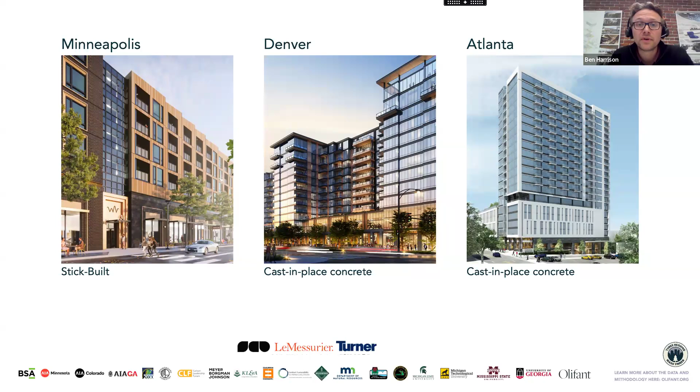Vincent kind of teed up what we've been working on for the past 2 years, and we're really excited to share some of the work: the carbon savings, cost, schedule, everything. We can dive into that. But first, we wanted to thank all of the organizations, suppliers, AIA chapters, and local architecture and engineering firms that we met with along the way to help us in this process. The process started with us meeting with all of those local AIA chapters to determine a program type and rough construction size that would fit within their context and something they may be looking for more of. Not surprisingly, the construction type that all 3 selected was housing.

We definitely have a housing crisis across the country, and each of these regions was looking for a more carbon-reduction and cost-reduction way to get more beds. Each region also was looking for a very different scale in building. Minneapolis was looking for the smallest size building, Denver was looking for that mid-tier, and Atlanta was really looking for that density in tall buildings.

Once we had the program and general size of the building down, we went back and selected three buildings that had previously been constructed, so we could provide an apples-to-apples comparison between a market viable building built in conventional construction and how that could be redesigned in timber, and what the result would be in carbon, cost, and schedule. Those are the three big things we looked at.

Minneapolis is a 6-story building, built in conventional stud framing. This was a 5-over-1 structure that we see across the country. Both Denver and Atlanta, at 12 stories and 21 stories, were high-rise type 1A concrete construction. We'll get into more of the construction types that we transitioned these three buildings into.

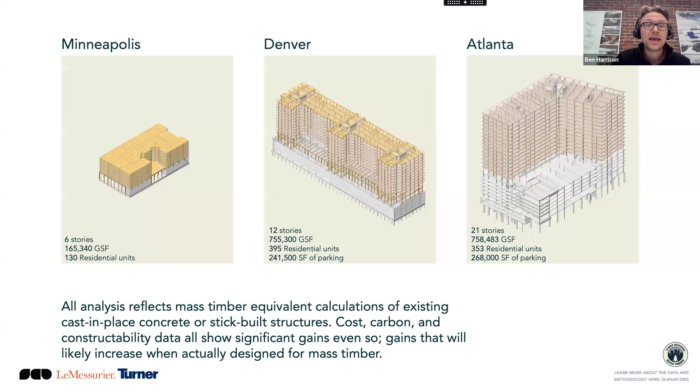One thing that worked out really nicely from the onset of this study is that each of these regions fell neatly into the new tall mass timber constructions outlined in IBC 21 and 24. It was important to us that these studies be not only market viable, but out-of-the-box code compliant. These don't seek any variances from the applicable codes in their areas, which is important because mass timber has been around for quite some time, but under the previous IBC there tended to be a lot of variances required to really maximize the potential of the material. This study looks at what these codes do to allow for this to be a third viable option.

When we're building big buildings, we think concrete, we think steel. Well, timber can be that third option and really diversify the building structures that we see in the market.

Minneapolis was type 4C. As a quick code review, I'm not going to dive into all the nitty gritty, but for the most part type 4C is 9 stories and below. The big thing to note is that this allows for 100% exposed mass timber—you don't need to provide any additional fireproofing to the mass timber.

Denver, it's important to note, is under IBC 2024. IBC 2024 has slight modifications to the tall mass timber provisions, allowing for 100% of the ceiling to be unprotected timber and 40% of the walls to be unprotected. This is slightly different from IBC 2021, but it's important to note that type 4B, which is 12 stories and below, is kind of the middle ground—some timber has to be concealed, some can be exposed.

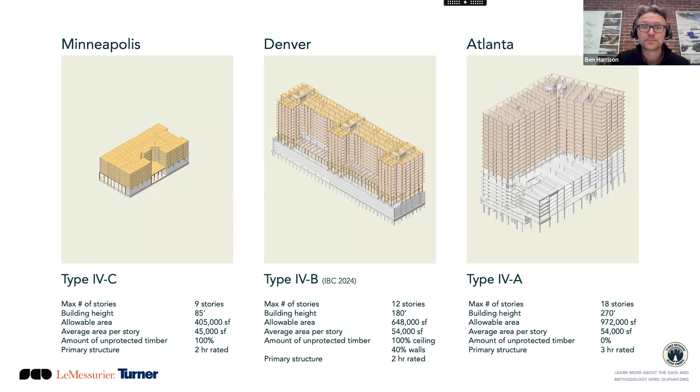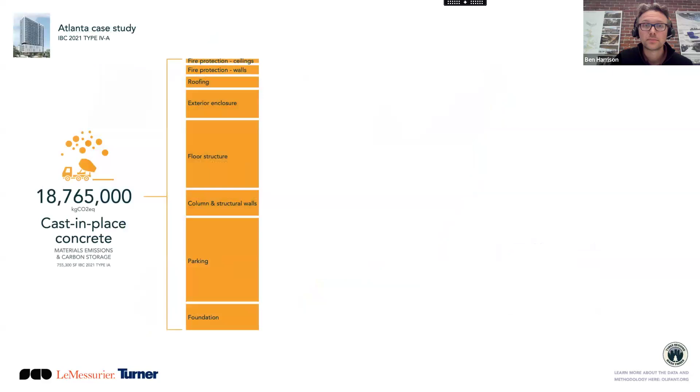Diving into the LCAs we did on these structures, at a macro level, for Atlanta the base building was a concrete type 1A construction—a podium style building with several levels of parking above grade, and the rest of the residences above that. The mass timber version keeps the concrete podium, since parking and concrete tend to work much better together, and it also allowed us to build slightly taller with mass timber on top of that podium level.

The mass timber itself is a post and beam with CLT structure. And what we see from a high level is about a 16% reduction in total global warming potential. What's interesting here, and we can dive into this on the next slide, is that it is...

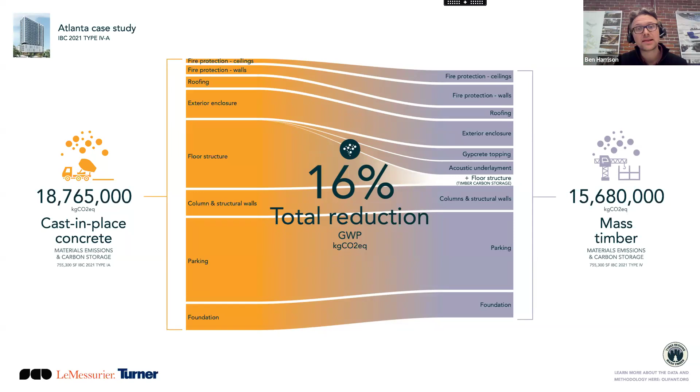It's not necessarily a reduction in every category. We can see that on those top two categories in fire protection, we really see a growth in the amount of carbon required. This is because Atlanta is that type 4A that requires so much fire protection around the members itself. Concrete has that kind of inherently built within it. But now I'll turn it over to Suzanne to talk a little bit more about these different categories that we analyzed for the global warming potential.

Absolutely. And just to build on that, our base case was concrete columns with 12-inch post-tension concrete slab on a concrete podium. We did go to a post and beam one-way system of glue-lam columns and beams with a 5-ply. It's good to note that the beams in the Atlanta case are perpendicular to the exterior. We'll see a slight difference in the variety on Denver. We do see in this chart in our study, the greatest reduction in carbon was due to the floor structure.

You do see an addition to materials. The GWP has addition of acoustic underlayment and gypcrete topping that's needed to meet the acoustic requirements. As Ben had mentioned, concrete inherently provides a higher acoustic protection. But even so, with CLT floors, we have that carbon storage, that reduction in embodied carbon. So overall, the acoustic assembly is still a much lower reduction than our concrete floor in the base case system.

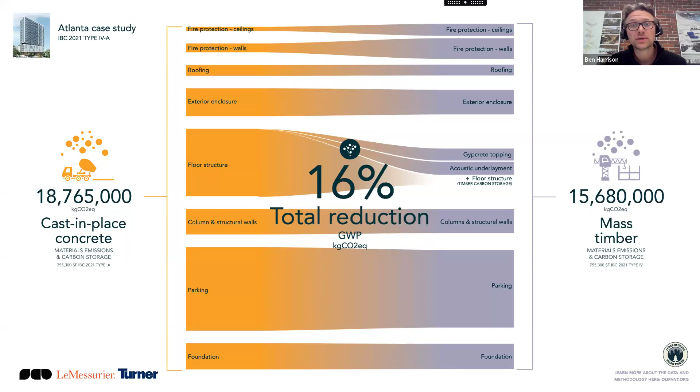It's important to note that we tried to keep everything exactly the same with the exception of the structure, and in cases where it wouldn't be feasible to build in that certain way.

Good point. Yeah, MEP coordination, always a challenge in there.

So overall, structural reduction reduced by 29%. For structural, we're including the foundations, the lateral system, the gravity system, as well as that acoustical requirements of the floor that I mentioned before.

However, note that the architectural embodied carbon increases. And again, this is mainly due to the fire protection. However, note that the architectural carbon changes are relatively small compared to the overall structural. So if you look at the donut in there, architectural is about 1/3. Structure is about 2/3 of the carbon.

And it's worth noting that of the structural component, over half of the embodied carbon of the structure is attributed to the 8 levels of stacked concrete parking that we have. So about 54% of structure's carbon is associated with the parking.

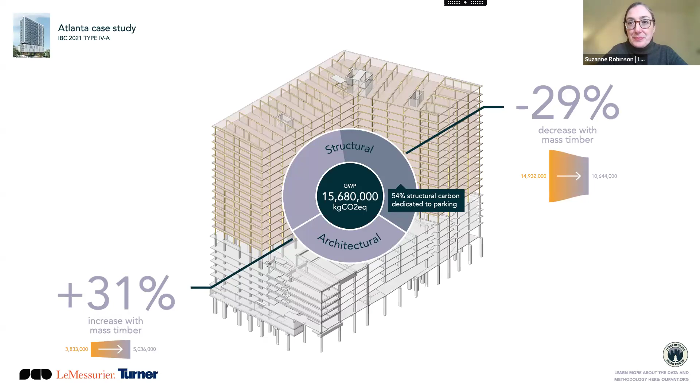When we move on to the Denver case study, this is transitioning to the type 4B construction type. This is going from the base building, which was cast in place concrete, type 1A construction throughout, parking podium with cast in place columns and floors above that, to a mass timber building that is post and beam with the parking podium below and glue-lams and CLT up above.

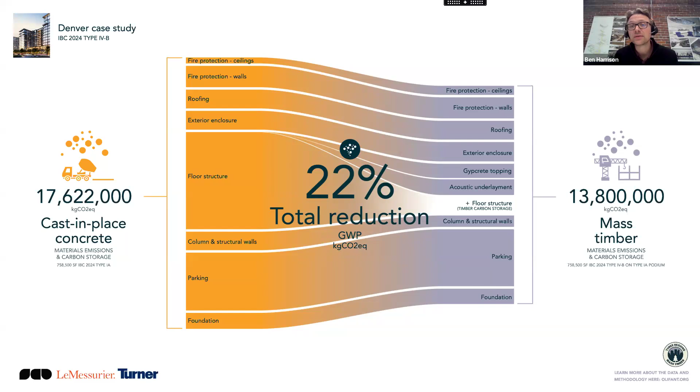We do see a greater reduction than with the Atlanta case. We're bringing in about 22% reduction in overall carbon. And this is largely due to the fact that Denver has pre-adopted the tall mass timber requirements of IBC 24, which allows for greater percentage of the timber to be exposed. That greater exposed timber results in carbon savings, cost savings, schedule savings. It's a huge kind of reduction across many levels.

So when we start to look at the individual sections, you'll see that there's a very minor increase in that fire protection because, again, we're able to keep most of that timber exposed.

So with Denver, again, similar to Atlanta, we went from a concrete column with an 8.5-inch post-tension concrete slab on that concrete podium to a post and beam, one-way glulam column and beam system with a 5-ply floor. In this case, the beams run parallel to the exterior, so we're able to really maximize the view from the units, which has a marketability aspect.

Again, the floors are seeing the largest reduction. It's wonderful going through and digging through all this analysis—that's one of the things that came out through all of these studies and what we're seeing consistently through other projects as well. Even so, we're having to add that gypcrete topping and acoustic underlayment, but overall we're still seeing a reduction, both in carbon and in the carbon storage that the CLT floors provide.

Again, the foundations, parking, and exterior show relatively minor adjustments in embodied carbon. And I'll note again, as Ben mentioned, that fire protection is almost neutral, falling into the categories of parking and foundations. This is due to Denver's adoption of the 2024 IBC provision for Type 4B buildings, which provides two options for fire protection. So in addition to gyp, we can now also design with char. By designing the structure to have char, we allow more mass timber to be exposed, which reduces the amount of additional materials needed, which in turn reduces embodied carbon.

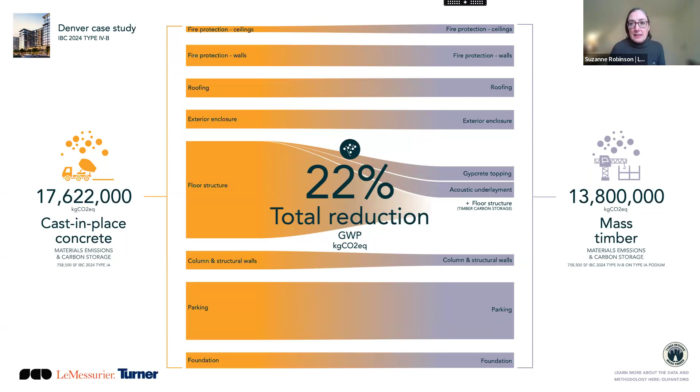So the structural reduction is 31%. Again, this includes the foundations, the lateral and gravity systems, and the additional acoustic requirements for the floor. There's only a nominal increase for architecture, 5%, compared to our 31% back in Atlanta. This is due to that alternative method of fire protection outlined in code, using less material by designing with char.

Again, structural is about two-thirds of the total carbon picture. Of that, 29% is the structural component of embodied carbon for the parking—that's the 4 levels of concrete parking, which is more spread out in this type of mid-rise structure.

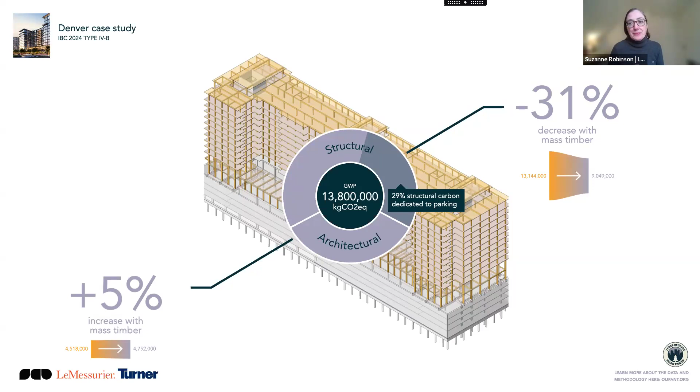When looking at the Minneapolis project, we see the greatest carbon reduction, at 42%. We transitioned from stick-built construction with a 1-story concrete podium to full mass timber in the mass timber case study. This is notable because we're able to go from a 5-over-1 kind of building with a 3-hour fire separation between them to one singular structure.

Just makes things a lot easier, and we see a great reduction. The other thing to note is that because the floor plate of a timber framed building is genuinely pretty tall, we actually noticed a floor-to-floor reduction in Minneapolis. We lost about 6 inches per floor, which is important because that shrunk the exterior. It allows you to fit into different zoning categories—it's a win all across the board.

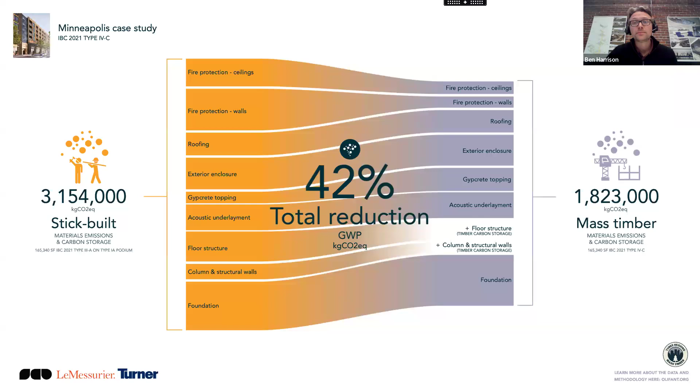When we start to look at the individual categories, we now start to see a reduction in fire protection. That stick-built system, especially the floor system, requires a fairly large buildup to maintain rated separation between levels. With timber, we're able to achieve that through char and topping in a slightly different way. So we're seeing the opposite of what we saw in the Denver and Atlanta buildings—we're actually seeing a reduction in fire protection.

Yes, and just to reiterate, the original base case was concrete columns with a 12-inch post-tension concrete slab, with light-framed wood for the residential units. We then switched over to load-bearing CLT walls with 5-ply CLT floors. So again, there's a floor reduction, even with the stick-build requiring similar acoustic treatment, because of the timber aspect. The reduction we're seeing with CLT is due to the carbon storage that CLT panels provide.

The other thing to note here is that fire protection was reduced twofold. The structure was initially a concrete podium with stick-build above, but now that we're switching over to completely mass timber for the entire structure, we can remove that 3-hour fire protection between the two building types.

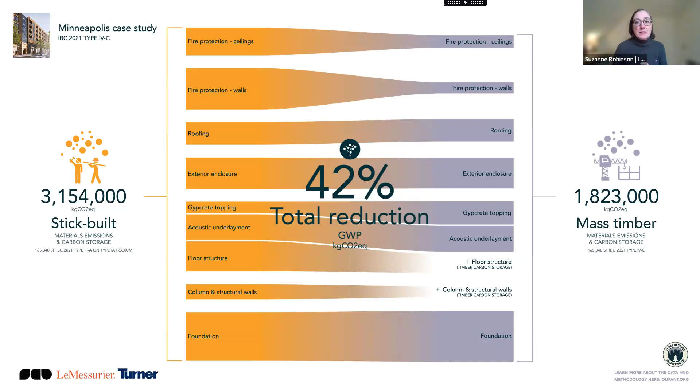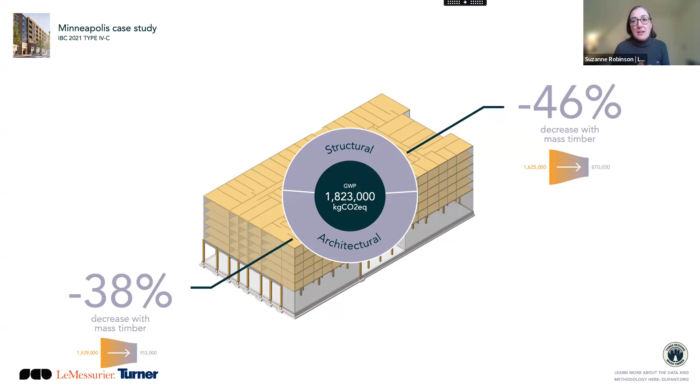So with this project, we're seeing an overall 46% reduction for the structural and a 38% reduction for the architectural. I think that's a nice win where we're starting to see both reductions on architectural and structural components.

So on the next slide, when we're looking at the analysis overall, first I want to take a moment and mention that throughout the study, we did consult with our partners, which included the local AIA chapters and also our local structural engineers.

I do want to give a shout out to our fellow structural engineers. We worked with Meyer, Borgman, and Johnson for the Minneapolis project, KL&A for our Denver project, and Equilibrium Engineers for our Atlanta project. We also worked with Carbon Leadership Forum, CLF, and Woodworks, as well as Turner's design team for the analysis review and design recommendations.

We did use Tally to develop our LCA, and the scope of the building analyzed included the structural elements and the architectural elements that would change between the two cases. So mainly it was the envelope as well as the fire protection components.

One thing of note is we've mentioned it a little bit, but I do want to bring attention to this. These were all existing buildings that are currently being built or have already been built. These are from a portfolio of projects within SCB's portfolio.

We are specifically looking not to have a theoretical project, but to really look at buildings that are market viable. How can we actually take these market viable buildings and turn them into mass timber?

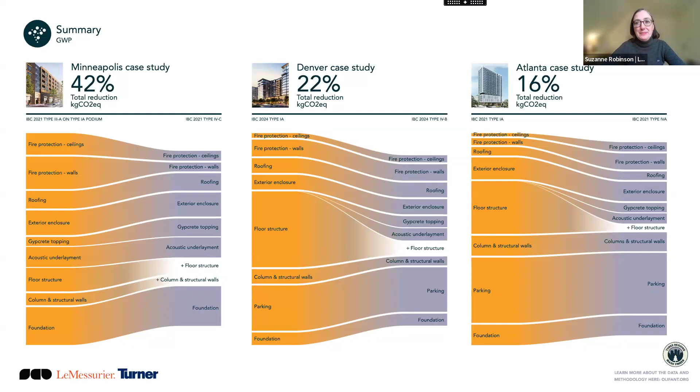As part of my role as an estimator, I love to get into the nitty-gritty of the drawings and develop a detailed estimate. So we were trying to think, at the beginning of this grant, how are we going to do this? It's easy for things to get lost in a detailed estimate when trying to decipher what's changing. The goal wasn't to deliver a 100-page slide of detail, but to pull out the highlights and tell the story of what changes when we switch from cast-in-place or stick-built to a mass timber structure, understanding the major scope changes and the cost implications. That was my main goal.

For context on the cost study: we were working with conceptual, schematic-level detail. Some assumptions were made where necessary, but for the most part I was able to quantify what was on the drawings. We relied on a mix of sub-market feedback and historical relevant data to put it all together. I'll quickly explain the numbers you're going to see on the next few slides as we go from Atlanta to Minneapolis, and wrap it up at the end with my conclusion thoughts.

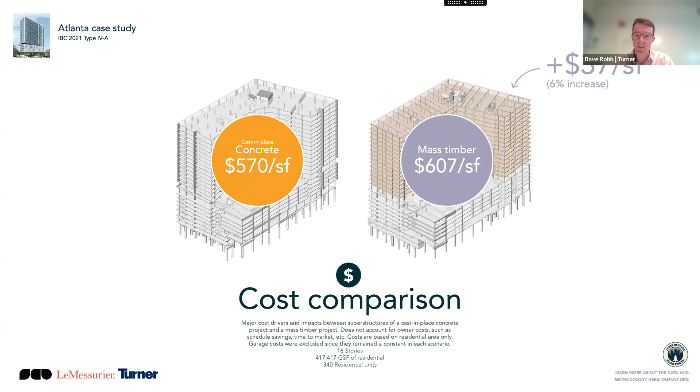Below, in parentheses, is the percentage delta on the overall project volume cost. So think about it two ways: the cost per square foot at minimum of what's going to need to change, and how that looks on your overall project volume as a percentage. If you hit it one more time, you'll see on either side what's trickling into some of these cost factors we saw.

Atlanta, as you heard, being type 4A, the most stringent for fire protection, you have three layers of drywall on all your elements, contributing to one cost factor. Additionally, that floor buildup is something you don't need in a cast-in-place building but need in the mass timber building. However, this building being as repetitive as it is, we ran a schedule simulation for cast-in-place versus mass timber. Mass timber with prefabrication leads to going much faster, in the realm of 3.5 months here. Thinking about your critical path schedule to get your structure up, that's significant, so we tried to give back, from the general contractor's point of view, some savings on indirects.

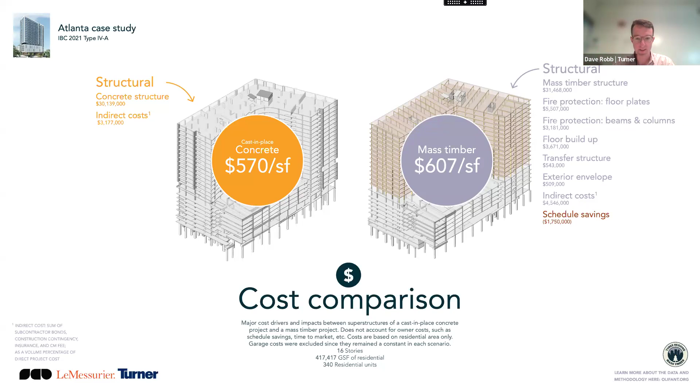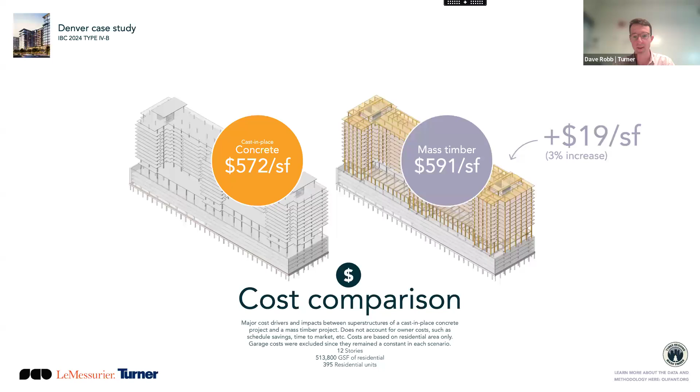Moving to the next slide, a little on Denver. Same exact layout here. We did a little better with type 4B, and some contributing factors you'll see are what we talked about: Denver adopting the 2024 type 4B code, where we have less fire protection on the underside of our CLT. That helped us considerably. Also, market feedback from some mass timber fabricators indicated efficiencies in this building that made it the most cost competitive of the three options. Additionally, you'll see here a significant schedule savings.

Just again, a repetitive building that stacks up. It's not quite as tall, but it's sprawling. And then lastly, another item you see there on Denver was some of the savings for the interior finishes with the ability to leave your ceiling exposed.

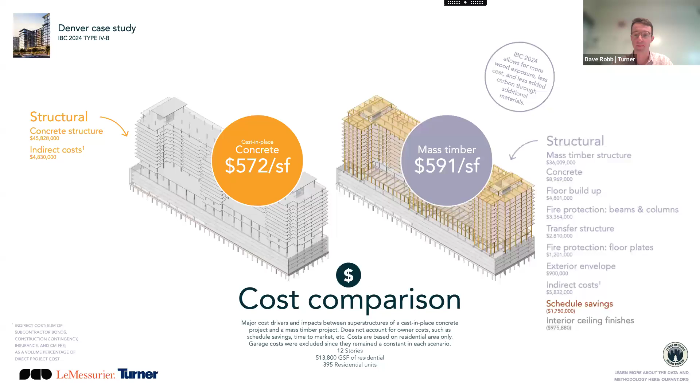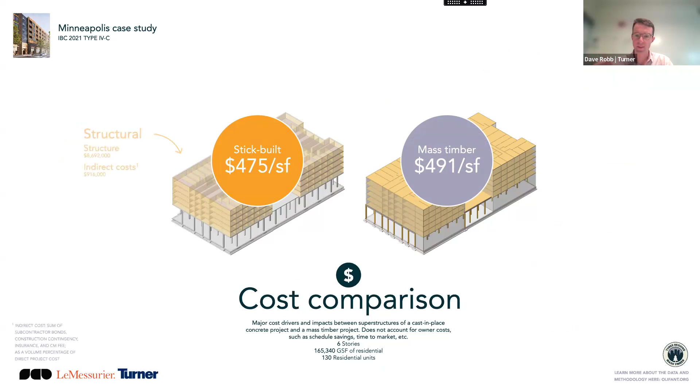Okay, and then if we jump over to Minneapolis, again we saw roughly a $16 per square foot difference here, 3% overall on the project volume. If you hit it one more time, you'll see the differences here, the contributing cost factors. On the previous two, Atlanta and Denver, the foundation was not part of the cost scope. But with Minneapolis, we were able to evaluate the foundations, and we found there was a slight reduction in the overall cubic yards of concrete, which was one of the cost savings.

And then additionally, what we talked about before, type 4C, there's no separate fire protection in this scenario, or I should say the fire protection is in the mass timber with the char rating. So it really allows you to lean into the aesthetic of the mass timber, and there's good potential there for interior finish savings compared to your base case. I will say the mass timber structure might have been a little more than the stick built, but I think in my closing thoughts I'll touch on that and ways to potentially mitigate that in the future.

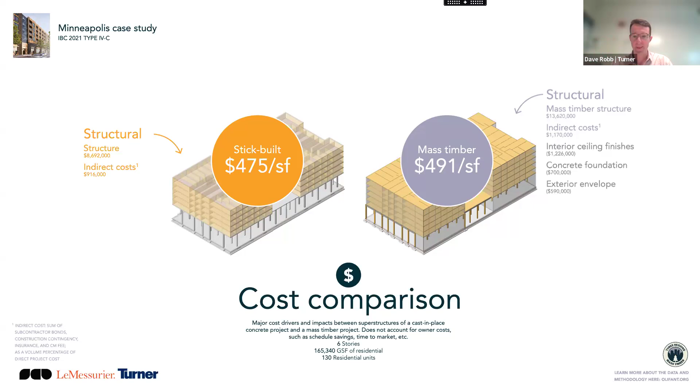Okay, I think what I'd like to do now is, I just threw a ton of numbers at you, which is not what I love to do, and I don't want you to leave trying to interpret all those numbers. Mostly I want to close with four main takeaways that I hope you consider after leaving today.

I think the first thing we've learned, and I hope is a good takeaway today, is understanding the Type 4 code now with A, B, and C, and how it's going to affect you, making sure you're trying to fit your project in the right code. Knowing that the fire protection on your elements is going to have a cost impact, so the higher you go, the more you need to cover, and the more additional layers of coverage you're going to need.

And then the second part of that is just the acoustical consideration. Again, we're talking about functional equivalency. If you want it, the CLT is going to need a little bit of help from an acoustical mat and some sort of gypcrete or concrete topping on top of that, in order to get the acoustical ratings that we're traditionally seeing in these residential buildings.

So the second part I hope you consider is, for our case, as Ben mentioned earlier, this is an apples to apples comparison for the sake of our study. And what we're seeing here for cost is really just the tip of the iceberg. I say tip of the iceberg because since we were doing the functional equivalency and were so apples to apples, I feel like there were some elements that might have been hurting us cost-wise in terms of advocating for mass timber. Ben mentioned it, sometimes we had to grow the building a little bit, and sometimes we had to account for transfer structures in order to accommodate the mass timber grid. However, even with all that built in, we are still getting within 3% of an overall project volume on two of those cases at a schematic level, which I think is totally viable, knowing there's room for improvement as you go through design.

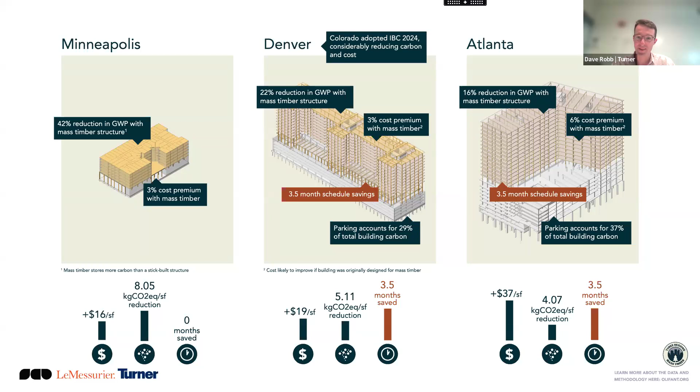So, those are my pieces. I want to pass it back to Ben here to close this out.

So we've gone through a lot, right? We've gone through all of the carbon savings, we've gone through some of the schedule and cost savings, and we wanted to leave you with the big takeaways, like Robb was just doing. This is a new building type, something we're now starting to see a lot more of, and the codes are starting to change to really adopt it.

So where do we see the sweet spot for this new thing? I think the reality is that 7 to 12 stories is really that sweet spot for building with mass timber under the current codes. As codes begin to change further and adopt more tall mass timber provisions, I think we'll start to see that super tall mass timber building—we've proven structurally it will work, but right now the codes haven't really caught up to it.

From a Type 4C perspective, we see the biggest strength of this as a replacement for the Type 3 over Type 1 construction that we see all over the country. It's been a tried and true, cost-proven way to get a 7-story building done quickly. We think mass timber can be an amazing replacement for that, with greater carbon savings, greater schedule savings, and as we've proven, very minor cost increases.

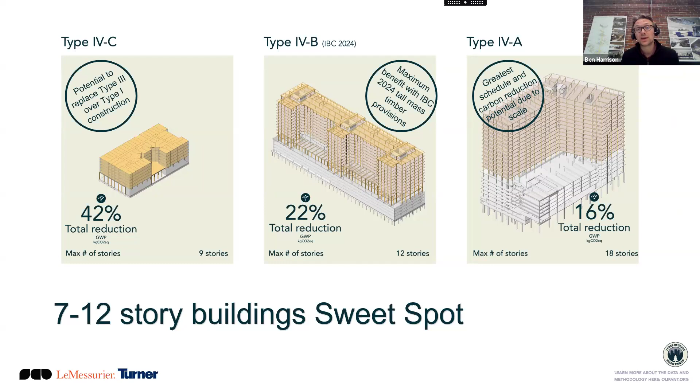And that can really unlock a lot of developments with Type 4B. We also see very substantial savings and the ability to really get a large area. So where Type 4C can be great for smaller buildings, Type 4B can really get you a lot of area with sustainable construction, and for this study particularly, really make a dent in the housing shortage we are seeing across the country.

We haven't talked too much about Type 4A, but it's important to note something Suzanne said, that Type 4A is really your largest building and has the greatest potential to reduce the amount of carbon. So even though this number of a 16% total reduction is kind of the smallest number we see here, it represents a larger amount of carbon that can offset your operational costs as well as the general carbon released into the environment.

So we hope that you take these key things away, and maybe next time you're looking at a development, or working with an owner and they want a 7-story building, you can propose doing it in mass timber. Or if you want a 10 to 12-story building, you can propose doing it in mass timber, to really, as Suzanne mentioned, provide a third building type that can become standard in the market.

So before I close, Suzanne, any final thoughts before we go to questions? Ooh, you put me on the spot here. I'm so sorry about that. No, you're good. There's some great questions too in the chat, so definitely look forward to addressing some of those.

I think the one thing I might pop on to talk about is that what attracted us to the grant was not just another LCA redesign, an existing structure kind of comparison. It was part of this larger structure. We're the second session of a 3-part session.

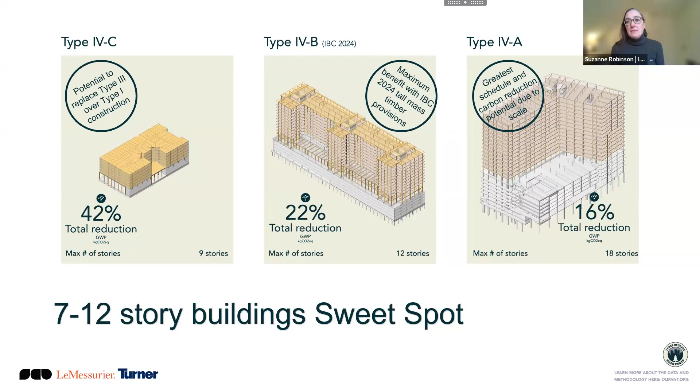What an amazing presentation, thank you so much. It was so well done in terms of focusing on the carbon comparisons and cost comparisons, and to have both of those side by side is really incredible, along with the different building typologies you focused on and the benefits of the code provisions, Ben, that allow you to expose more of the mass timber. We've got a lot of great questions, and about 10 minutes left in our scheduled hour. I feel like we could have made this an hour and a half given how many great questions came through, so I'm going to do rapid fire, and please keep your answers relatively brief. We have probably more on the cost side, so we'll get there, but let's knock out the ones on the carbon analysis question first.

We had a question, particularly for Suzanne or Ben, about the relative proportion of emissions saved, not necessarily the percentage reductions but the scale issue. Did you do a carbon per square foot comparison, or even a carbon per occupant, given that we're talking about housing? And how does density change that?